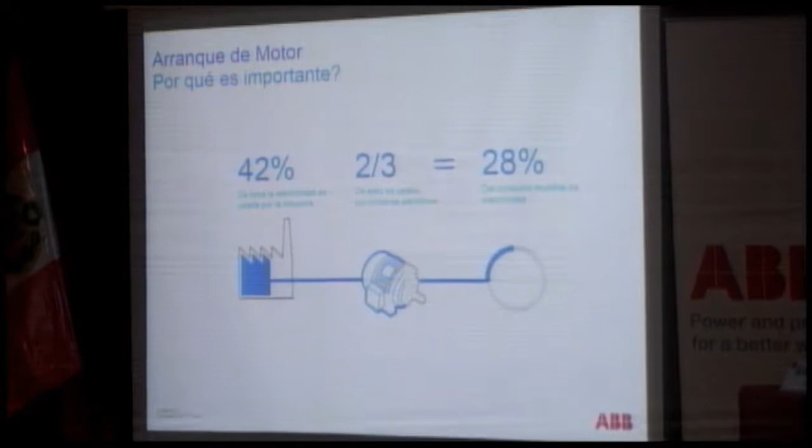Today, in the world, there are currently around 300 million electrical motors installed and running. 300 million. And this is a number that is growing steadily every year.

Out of these 300 million motors, around 90% of them are running and used in full speed applications. So when we talk about improving starting of motors, we cannot only talk about the 10% of the motors where we are allowed to vary the speed. We need to talk also about the motors that have to run at full speed and how to make them behave better.

So with all this electricity consumed by so many motors, imagine the potential we have to improve the world by doing motor optimization.

So really my first message to you today is that it matters what kind of starting method we choose, because there are so many motors we are talking about and there's so much electricity consumed.

To give you an idea of how important the electrical industrial motor is today, we have a short video showing different examples of where you will find the motor.

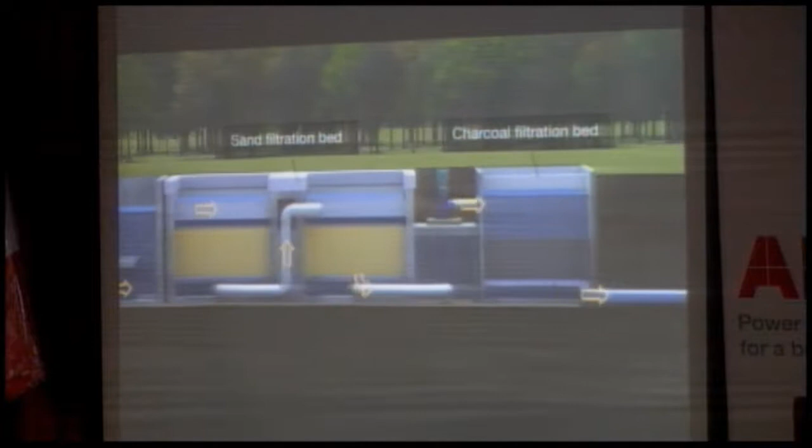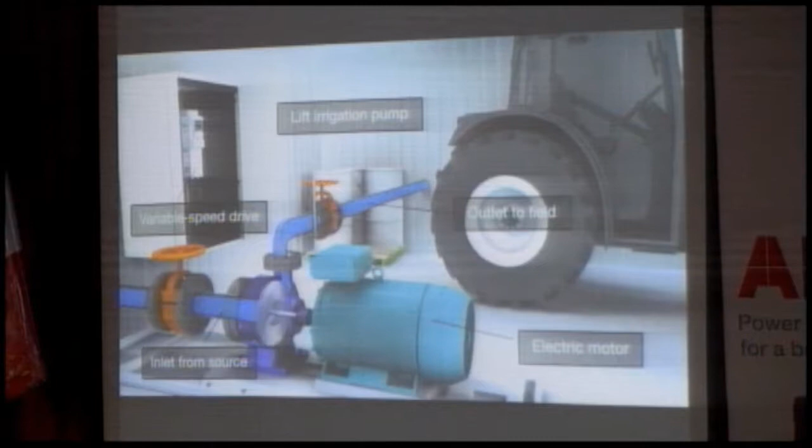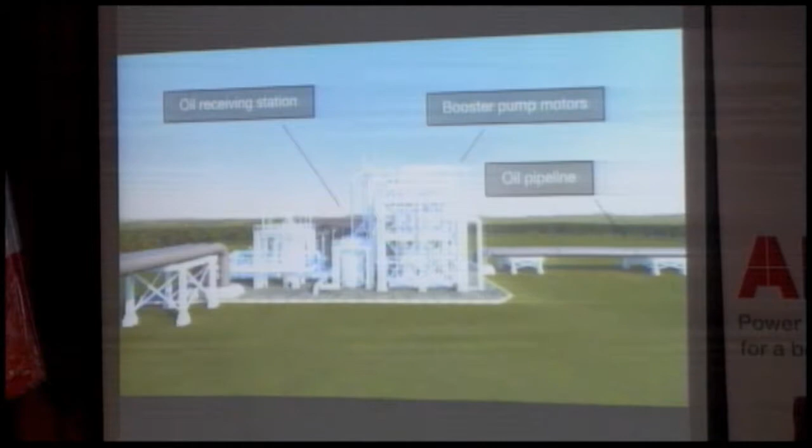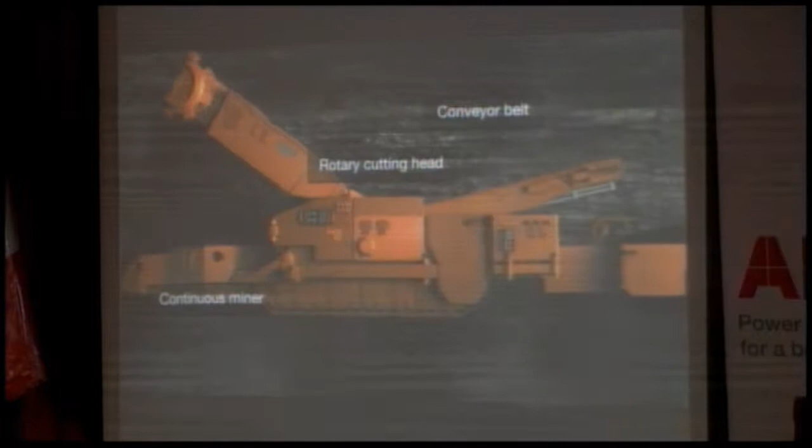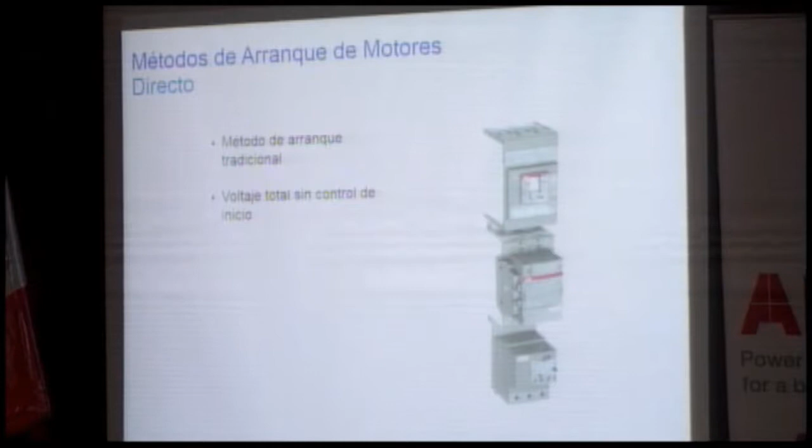It's possible to use the contactor, that is the active part of the starter, and combine that with other products to create a more complete starting solution. For example, on this picture, we have the thermal overload relay that will prevent the motor from being damaged by overload. We also have the circuit breaker that will protect the motor from short circuits.

It's the most compact starting method. It's also the cheapest one to buy. That's why it's so popular, and for this reason it's also mainly used for starting smaller motors.

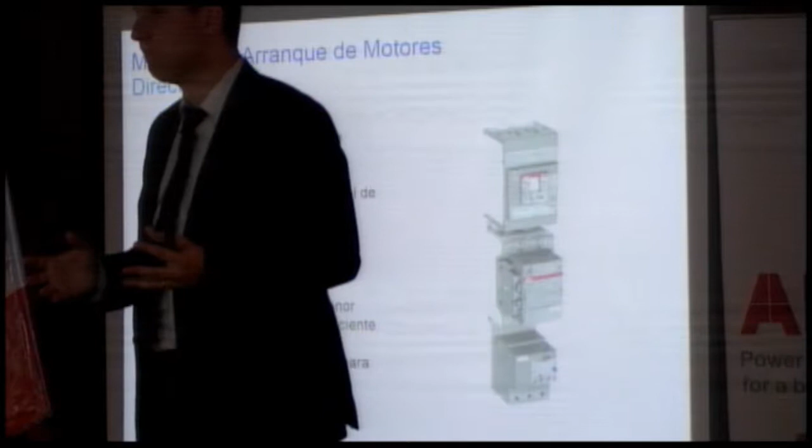But there are some things that I think you should be aware of that are consequences from using a direct online starter. We know that it's compact, cheap to use, and easy to install and understand. Those are the main benefits. But we can run into some problems.

For example, we can experience that the voltage drops during the start. This can cause problems. We can also experience that the short circuit protection will trip during the start, and this comes from the way the current is behaving during the motor acceleration.

So when we start the motor, what happens at first is that we get a very high inrush current, a peak in the current that can be as high as 20 times the normal current. Of course, the current will go down, and during the start it will follow the characteristic of the motor. But this current peak is something we need to think about when we design all the other equipment in the panel that's able to run this motor.

Then we can also experience problems with mechanical wear and tear, products that are damaged, and slipping belts. This comes from the characteristics of the torque during the start. The motor is often very powerful during the start, and it will start with a lot of extra torque that may not be needed, and the acceleration will be very fast. So this is something to think about before selecting direct online starter.

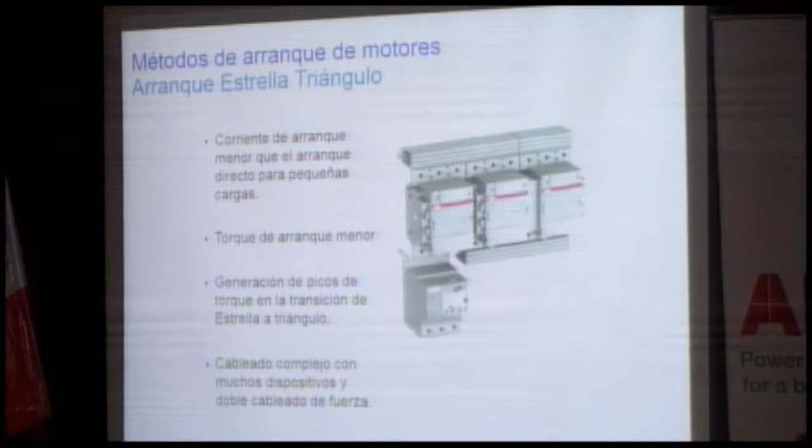To be honest, the star delta starter is a little bit complicated to install. It's a lot of cables, it's a lot of products, and it takes a little bit more time to install. Something to be aware of as well.

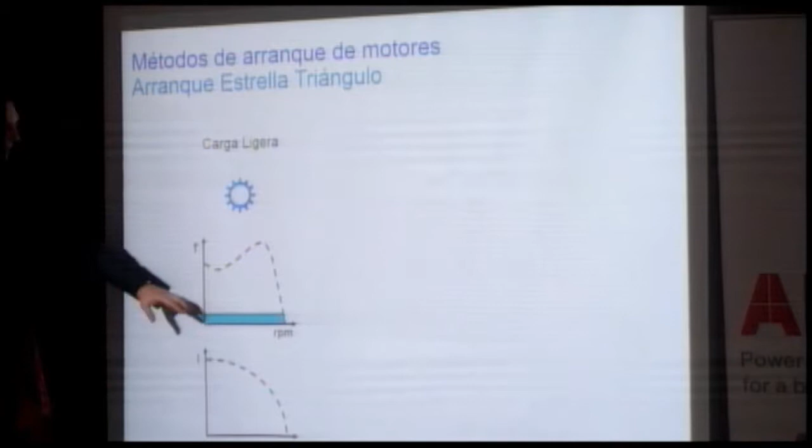So I thought I would show you a quick example of how the start will look for different kinds of loads for the star delta starter. We start with a very light start, an unloaded motor. What will happen when we start? Well, we can see that we can reduce both the torque and the current quite a lot during the start, and this is really good. This is a good solution for a small load.

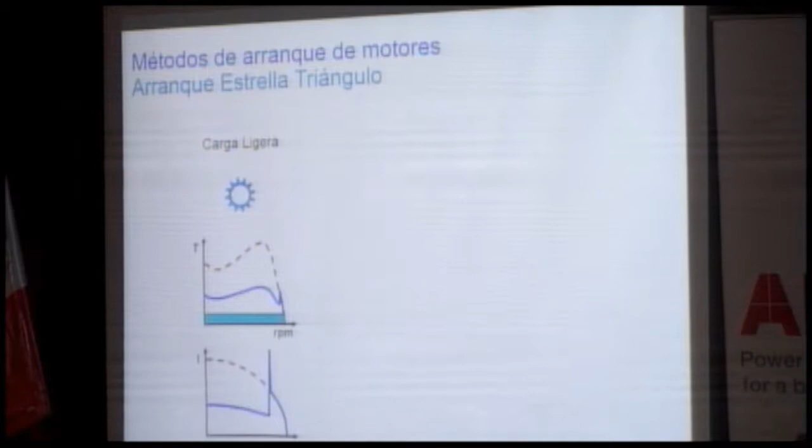When we have a medium load, typically a pump or a fan, we will see that the acceleration will be slower. So when we change between the star and delta connection, we will see a drastic increase of the torque, and this can cause a lot of problems. This can also lead to very high peak currents, something we need to be aware of.

And if we have a very heavy load, it can be a crusher, it can be a transport band that is heavy loaded at start. When we press the start, nothing will happen at first. The motor will be standing still and just making a noise. And then, after 10 seconds, we will do a direct online start when we go over to the delta connection.

So to summarize, for the star delta, it works very well for a small load. It doesn't work at all for a heavy load. And for a medium load, it can cause a lot of problems, even more problems than the direct online starter will do. Something to think about when designing a starting solution for a motor.

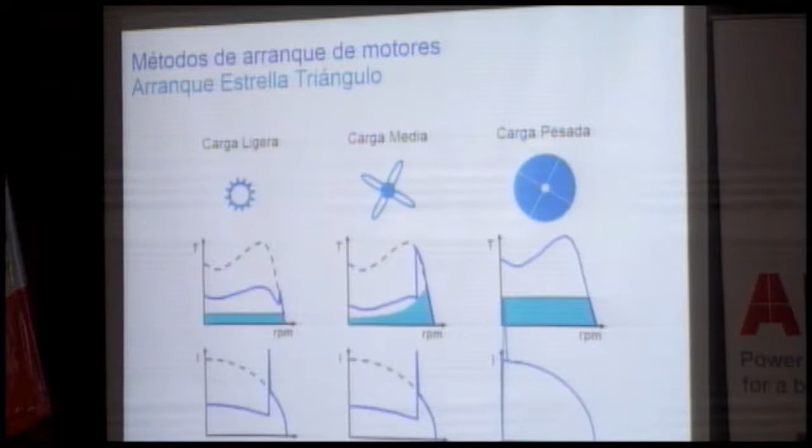Sorry. Okay, I would like to talk to you about the drive as well, a starting method that is getting more and more popular. The drive will give you full control of the acceleration, full control of the current, and full control of the torque. So it's a very versatile starting method.

It will enable you to reduce the energy consumption of the motor by reducing the speed of the motor when you don't need a full speed. For that reason, it's very good. So that is why it's very often used in process industry to obtain process control.

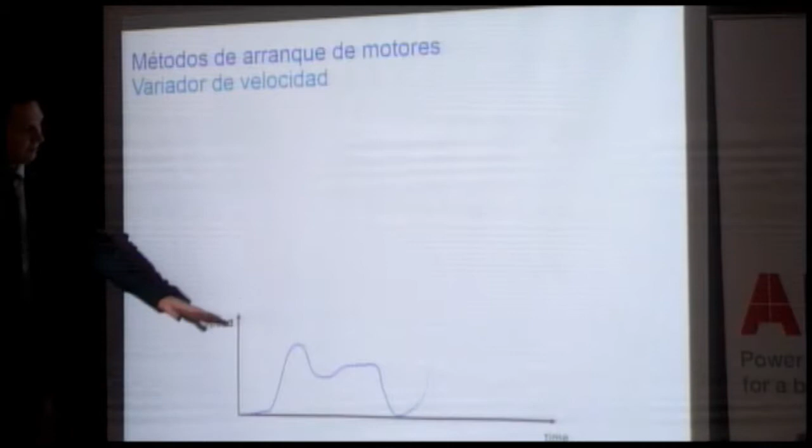But there are some things, there are some concerns with the starting method. So I would say that it's only when you have a motion pattern of the motor that needs to look like something like this, it goes up and down during the day, then you should definitely pick the drive as your starting method. But if you can run in full speed, you should consider another starting method because there are some concerns with this technology. For example, it is expensive to buy.

It is the most expensive of the three starting methods. It's quite big and heavy. A comparison: a soft starter for a 200 kilowatt motor has the size of something like this between my hands, and the weight of it will be around 15 kilos. A drive for the same motor will be of the same size as I am. It can be 2 meters tall, 1 meter wide, and the weight can be 200 kilos. So it's a completely different kind of product that needs a completely different kind of equipment to even install.

The drive will create harmonics. Harmonics are overtones, disturbances on the network that come from the way that the drive is changing the frequency. And this can cause problems for other equipment in the network, which puts higher requirement on how to install the products, with proper grounding of the cables, for example, and having good quality cables that can handle this.

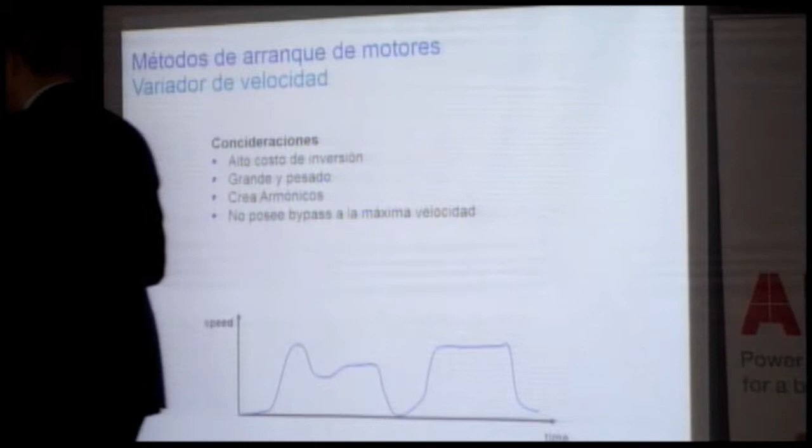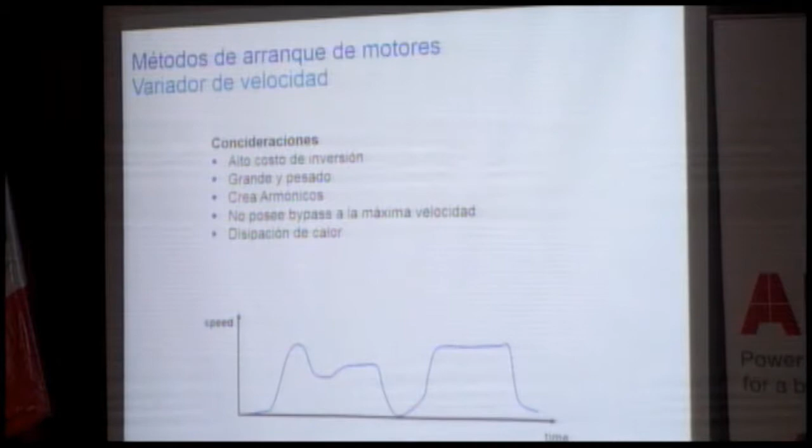You don't run the drive in bypass mode, so it will always be running with the IGBTs, and that means that it will generate a lot of heat in the panel. I will give you an example: a soft starter running on the thyristors for the 200 kilowatt motor will generate around 1000 watts. When we go in bypass mode with a soft starter, we reduce that energy consumption by 90% down to 100 watts, while the drive will consume more than 3,000 watts in heat. Something to think about.

It's not always suitable to reduce the speed of a motor. Sometimes the application will not behave well if you reduce the speed, it can cause some problems. So if you don't have need for changing the speed, you should consider another starting method. That's the message, okay?

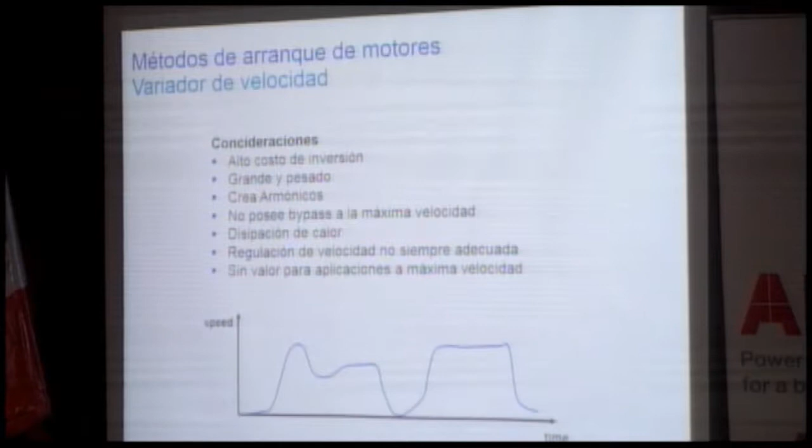Let's continue with the soft starter. The soft starter can do a soft start, of course, but also a soft stop of a full speed application. For that reason, it will reduce the starting current, it will reduce the starting torque, it will reduce the acceleration of the motor. And for that reason, it can save a lot of money for the user of the motor when it comes to less maintenance and service cost for the equipment.

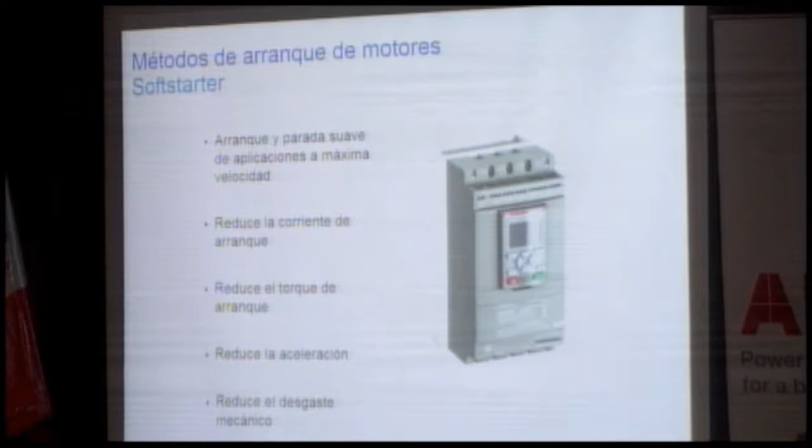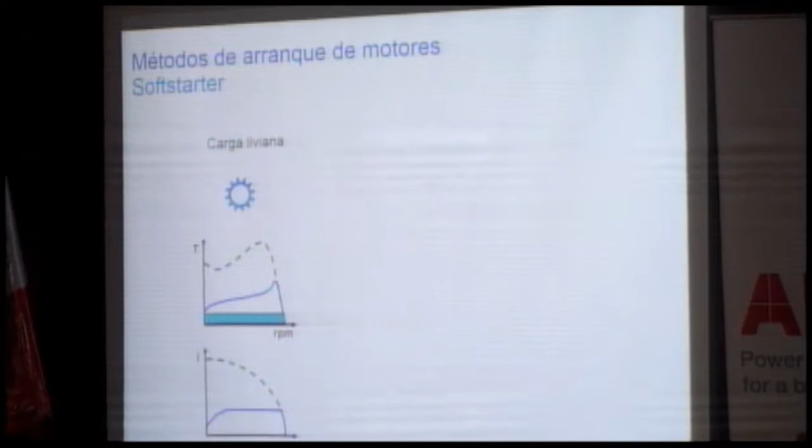If we are going to do the same start as before, but with a soft starter for the unloaded motor, we can see that we now get a similar torque and similar current as a direct online start, the star delta starter. So it both works very well. For the pump, now it's getting very interesting, because the soft starter never gets any drastic increase of torque, which means that it's a much better starting method for the pump.

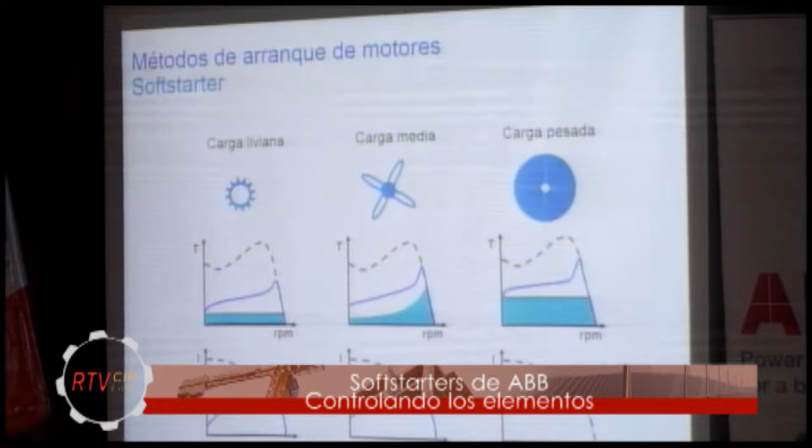And for the heavy load, we can also start it because we can change the amount of torque that the motor will get, so we can adapt it for different loads. Okay.

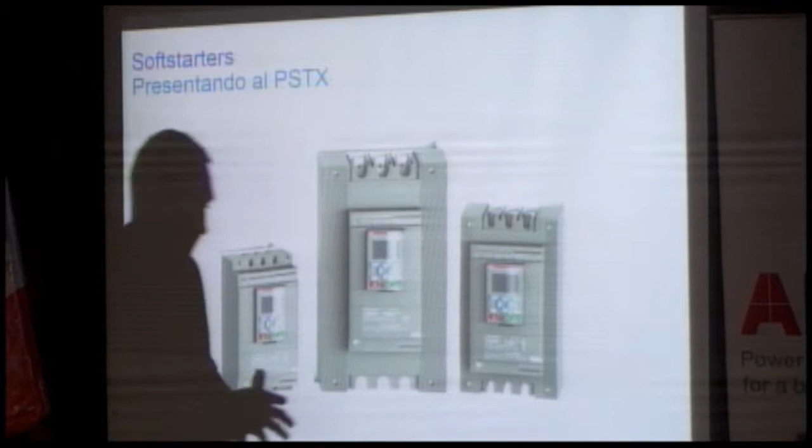Let's go into the new products and all the things we can do with the PSTX. The PSTX is the new generation of soft starters that takes the technology lead for soft starting on all markets.

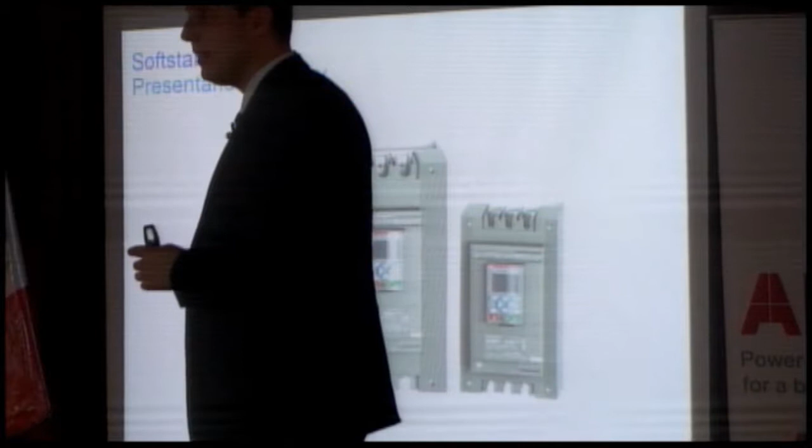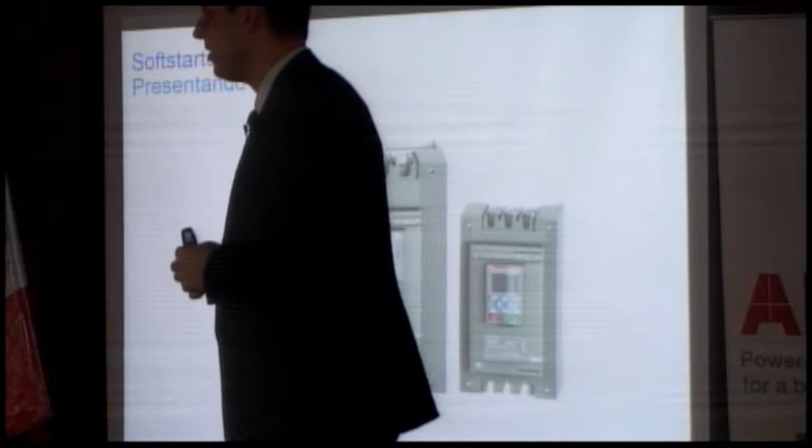We released this product some months ago, in July it was released worldwide. Step by step we have introduced this product to more and more markets, and I'm very happy to be able to introduce it to you and the Peruvian market today. We have already tried this product in Peru with great success in harsh environments, and I will come back to that later. We have also tried the product in many countries, in different continents of the world, in different environments, applications and segments. It's really showing strong results, and we have a lot of happy customers so far.

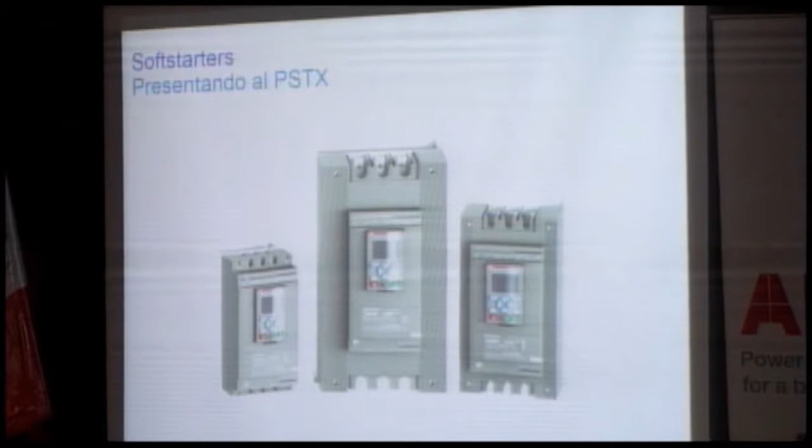To present this product, I would like to give you 3 examples of real customers and what they have told us about their experience using our soft starters. I will tell you about one customer who could reduce his starting currents by 60% by using our soft starters. I will also tell you about a customer that could build panels that were 20% smaller thanks to our soft starters. And I will tell you about a customer that got 100% longer lifetime of his pumps thanks to our soft starters.

Okay, we're going to go through them one by one. Let's start with the first one.

This is a customer that is based in Italy. It's an HVAC specialist, which means that they are making equipment for air conditioning and ventilation. This company, called Rhoss, makes air conditioning units similar to the one you can see in this room. They had a specific demand that they needed to do a very fast start due to the need of the scroll compressor, and that start was not allowed to bring a high current because they need to install the equipment in a lot of buildings, not only in heavy industry.

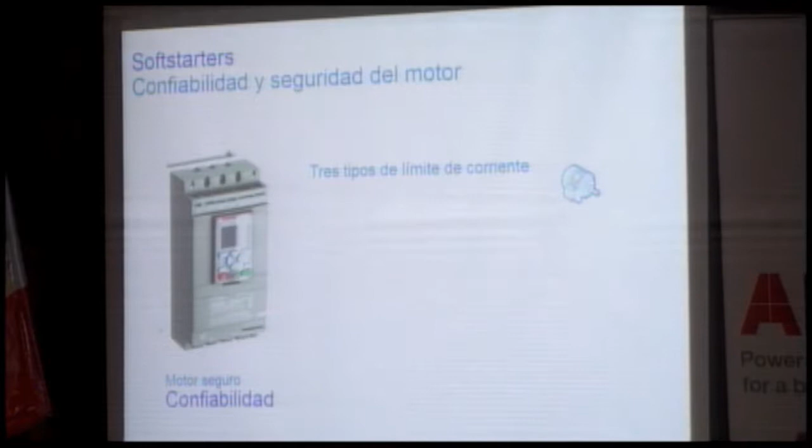I will also tell you about our new motor heating feature. We can use the soft starter to heat the motor when it's needed. I will talk about that as well. And I will tell you that we now have complete protection of the motor included in the soft starter, so the motor will be better protected than ever before with the PSTX.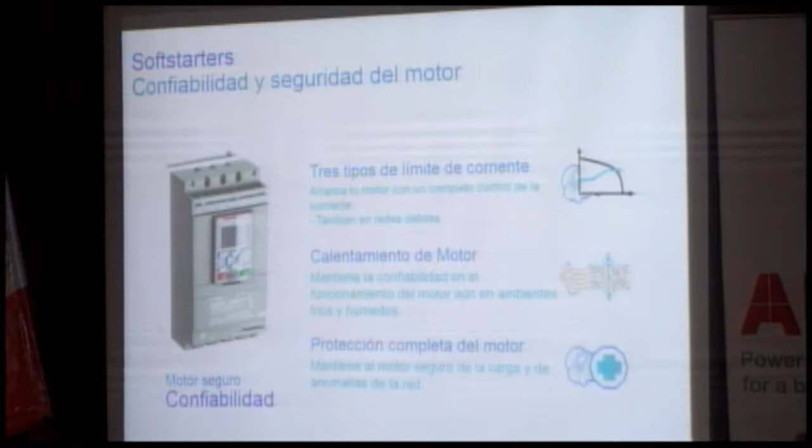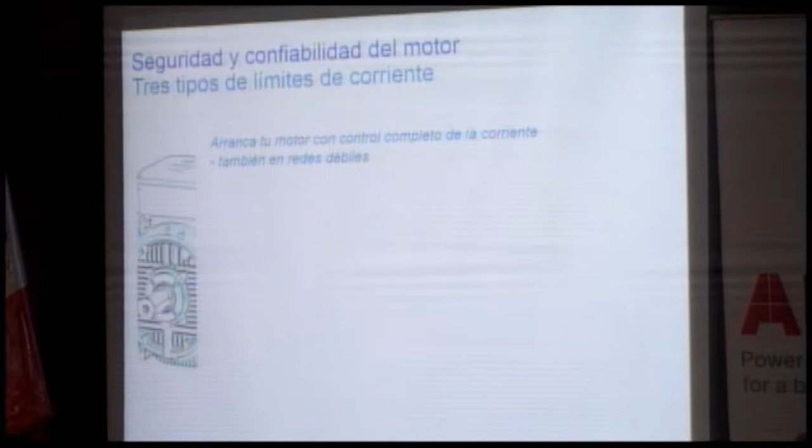So let's start with the first one: current limit. Current limit has been a feature that has been very popular for many years now. It is used by almost everyone. It allows the customer, the user, to put a maximum level of the current during the start. Very good, because that allows you to design the rest of the equipment according to this.

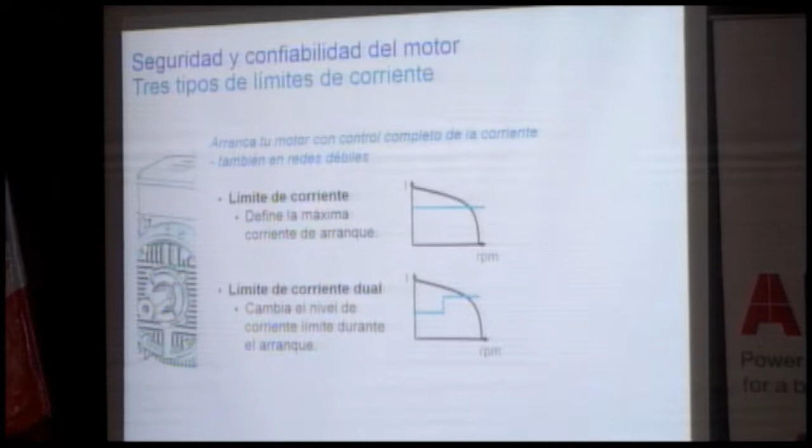But we are also introducing the dual current limit that allows you to have a lower current limit during the first seconds of the start. And when the motor is starting to accelerate, we can give extra current. This is good when we are starting in a weaker network. But the new thing with the PSTX is the current ramp, that we can increase the current softly during the start. This is very good when the transformer is not that strong.

Especially a generator can be a little bit tough to start in the beginning, and it will need to start more gently, so this is the softest start that you can get. It's really good, and this will solve a lot of problems that we otherwise could see in installations far away, in mountain areas, in mining industry, or on platforms out in the ocean where the network can be unstable.

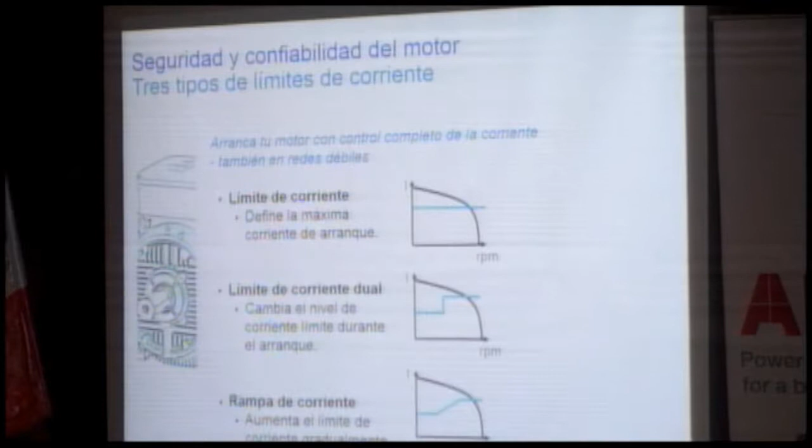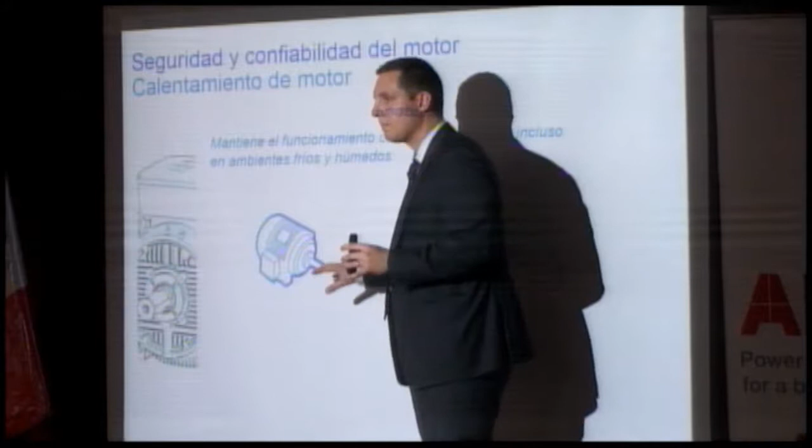We are also now introducing the motor heating feature. Why do we do this? Well, a motor can be installed in a lot of different environments. For example, in Sweden, where I'm from, we sometimes need to install the motor outdoor. So what happens in December? It snows, the temperature goes below zero, it gets wet and cold. So when we try to start the motor, the start would be very tough because the motor can even freeze. So what we have to do in Sweden is have a heater around the motor to give some power to heat it up before we start.

But with the PSTX, we have included this into the soft starter because we now have the possibility to use the windings inside the motor as heating elements and give power to them, not in a rotational magnetic field so that the motor will spin, but just in a way so we use them with DC power from the AC network and heat up the resistor and warm up the motor from the inside as a pre-starting functionality.

This is not only good in a very cold environment, because you can find cold environments not only outdoors in Sweden, but also indoors in different kinds of cold rooms, like when you have ventilation and cooling. It's also very good in countries or areas with high humidity, tropical areas, because the moisture can get inside the motor and damage it. With the preheater, we can warm up the motor first, make sure it's dry, then we do the start. This increases the reliability of the motor and makes sure it lives for a longer time. It's very nice.

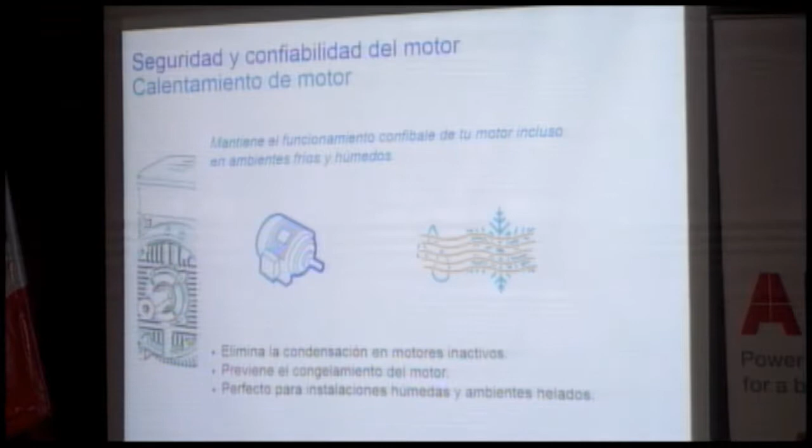Then we have motor protection. This is something very popular to include in the soft starter today: the possibility to detect different kinds of load conditions and abnormalities. For example, you can have a transportation band that suddenly has extra weight put on it, and the motor will run tougher and tougher with higher current. This can be okay for a few seconds, but if you run for too long, the motor will be damaged. The soft starter can detect this and stop the motor.

It can also detect when the load is disappearing, and I will show you an example of this in just a minute. With the PSTX, we include protection that can be connected to PT100 and PTC elements in the motor, so we can monitor the actual temperature inside the motor. The difference between these two is that the PTC gives a digital signal to the soft starter when the motor has passed a certain temperature, while the PT100 gives the exact temperature of the motor all the time, so you can monitor it.

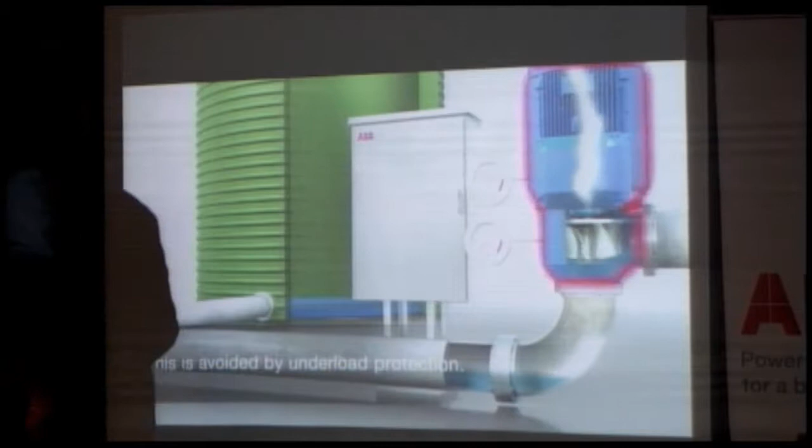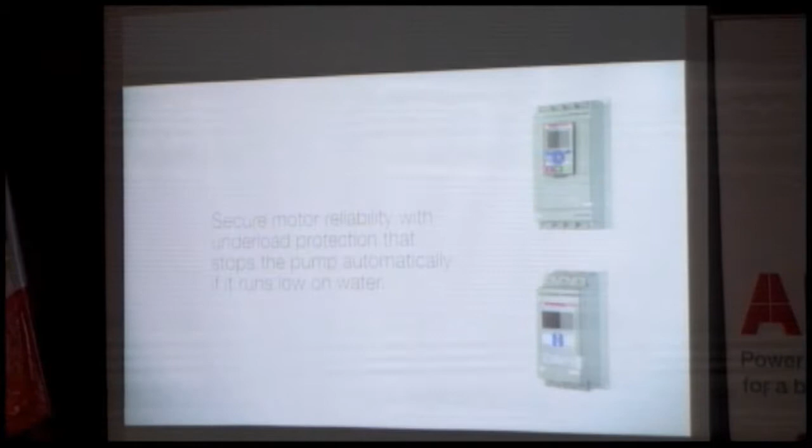So this is the underload protection. Imagine you have a pump system like this, pumping water. But for some reason, the water starts disappearing, which means the water runs out and the pump runs dry. What will happen? The pump is not designed to run without water - it will be damaged by this. If you do this too much, you will have to buy a new pump. With the PSTX, and also the PSE soft starter from ABB, you can detect this and stop the motor if it happens, saving the pump and saving a lot of money.

Let's take a look at the second customer case.

This is a customer from China. This customer is a system integrator, and they are specialized in building starting solutions for crushers for the cement and mining industries. A crusher is what we call a heavy-duty application. It's very tough to start, it's a lot of current, and in this case it's also installed in a very dirty environment.

This company was using a competitor soft starter, but they were not satisfied with the size of the panel, and they turned to ABB. We offered our solution, which has the bypass included in the soft starter, and also has a very strong design of the thyristors with a high starting capacity. So we could use a smaller soft starter than the competitor had to offer. The result: the whole panel became 20% smaller.

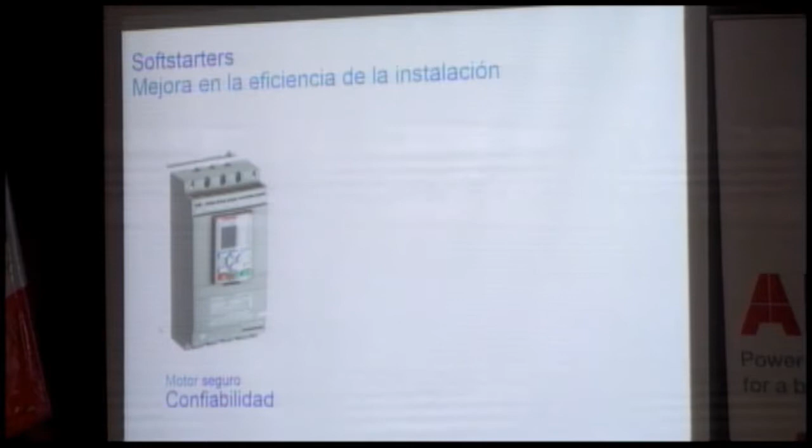The value that this company experienced is something that we call improved installation efficiency. I would like to show you a couple of examples of how we are improving efficiency when it comes to installing, running, and operating the soft starter.

I will tell you about the new keypad that is detachable, which means you can remove it from the product to put it on a panel door. I will also tell you that we have now made a built-in bypass standard for our soft starters, so that you are always sure you have the bypass. And I will tell you about the new, more flexible way to do field bus communication.

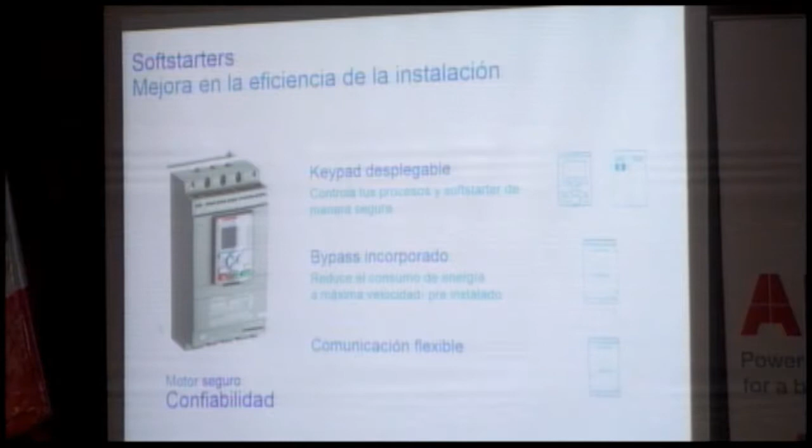Okay, let's start with the first one. With the PSTX, the keypad is removable from the product. So you can take it off and put it on your panel door and just connect it on the back with a cable, a cable that is included as well.

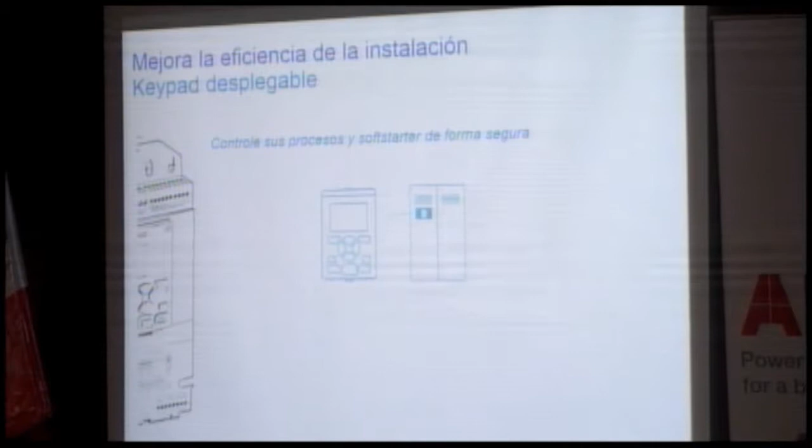Why would you like to do this? Well, if you would like to make a safe installation where the operator never has to open the panel door just to monitor what happened with the motor, or change the setting, or check the status of the soft starter or the motor. Because if you open the panel door while still running the process, there is a big risk of danger, because you have high voltage and high currents in the panel. If you put the keypad on the door, you don't need to worry about that, and you can monitor and change settings without putting yourself at any risk.

We think this is so important at ABB that we make sure everyone gets a keypad that they can put on a panel door. Before, we offered it as an accessory that you had to pay extra for. Now it's included, and it's so easy to install. You just need to punch or drill a hole in the door, put it through the hole here, and use the nut to lock it on the other side, and then you're done. Very good.

This keypad has protection class IP66, which means you can wash it with water. You can install it in harsh environments with high humidity, or where you need to clean the panel with water for some reason, or even outdoors. It's very robust, very reliable.

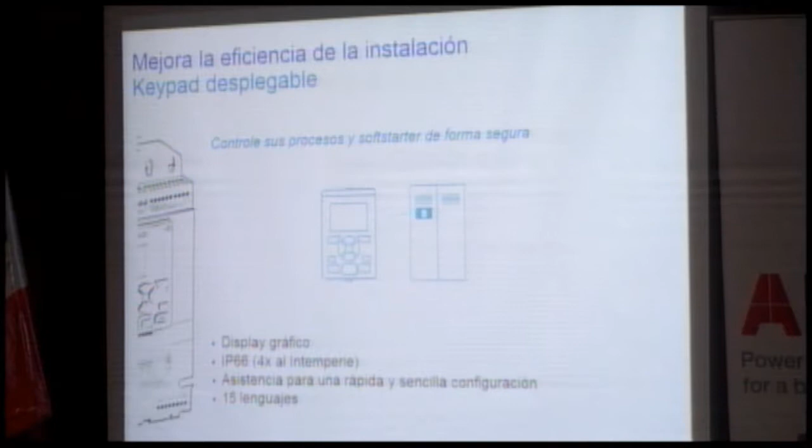We have also put a lot of effort into making setup and using the soft starter as easy as possible. For example, the display is graphical, which can show text, numbers, and even pictures. And we have assistants included, which means that with just a few clicks of the buttons here, you can prepare the soft starter for start. It's very easy.

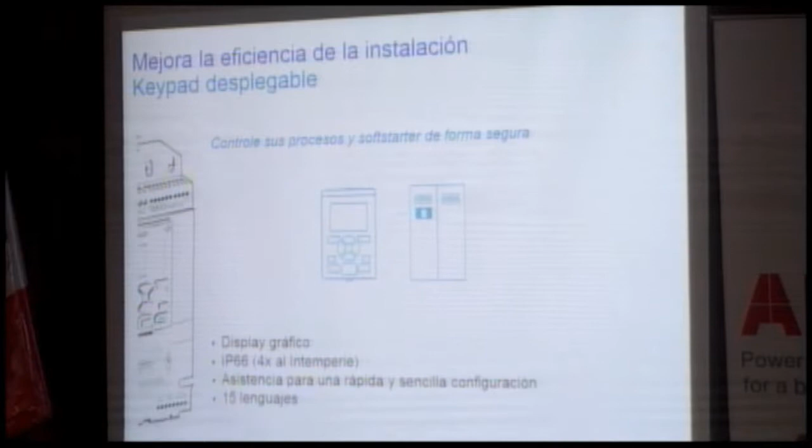The next example I would like to talk about is the built-in bypass. A bypass is a very important device to make sure that you're not using the thyristors more than you need to. You would like to have the bypass because you want to save the thyristors so that you can use the Softstarter for a longer time, and you would like to save energy from the heat losses.

This is so popular and common today that we have decided to do the job for you and include the bypass into the product, making it more compact. Thanks to this, you don't need to worry about selecting the correct bypass, you don't need to install it, and you don't need to verify that it's working, because we have already done that from the factory, so you can save time. We think the bypass is very important.

Communication. Communication is something that is getting more and more popular, to be able to have contact with the Softstarter from a distance. We have made this very easy now. We have made sure that Modbus RTU is included in the Softstarter so that you don't need to buy an accessory or install an accessory. You just connect the two wires to the Softstarter and set it up for Modbus. Very fast, very easy, very cost efficient.

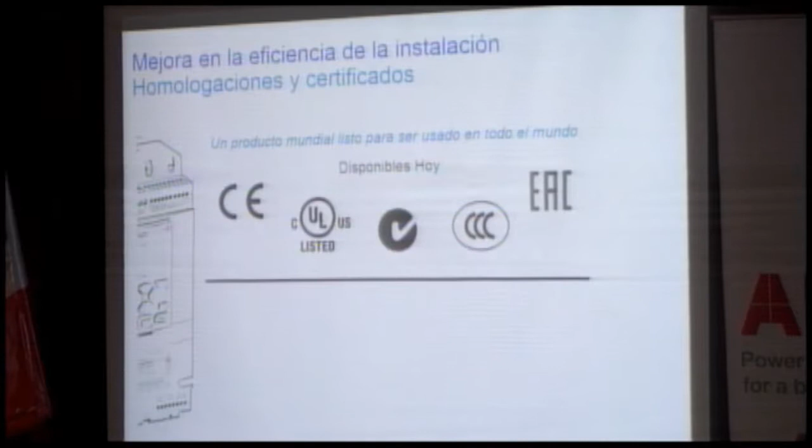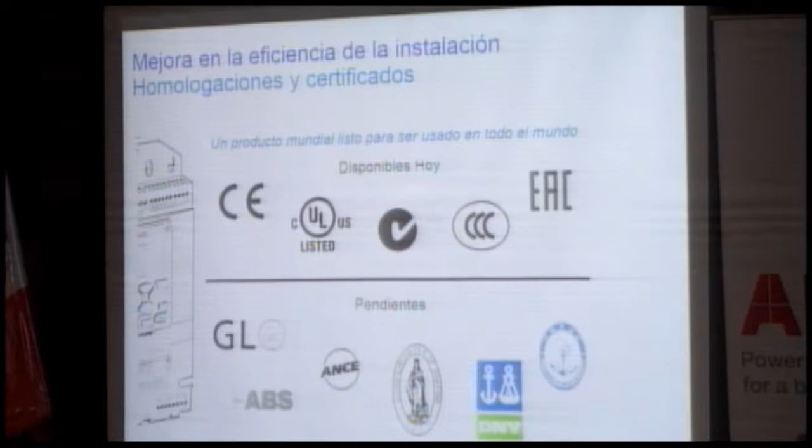This soft starter is designed to work everywhere in the world, and we have certificates and protocols to support that. So of course we are following the IEC standard, and the product is marked with that, but it's also available for the American, Australian, Chinese, and Russian markets. Right now, we are waiting for the certificate for the marine approvals to come - it's just a matter of weeks until they are ready. Then it can be used in different kinds of vessels and ships. Also very good, so this is a global product.

Let's go into the third scenario and the third value. Now we are talking about an end customer. This is a customer in Russia.

This customer has used a soft starter in a very nice solution that is able to protect the harbor of St. Petersburg from the forces of the Baltic Sea. This is not too far from Sweden, and it can blow quite heavily sometimes. When it blows a lot of wind in the ocean, it can blow a lot of water into the city. To protect themselves, the city has built a wall out in the ocean, just a few hundred meters away from the harbor. But since they have a working harbor, they need openings, doors that can open and close. For this application, we are using pumps and our soft starters to run them. This customer experienced that now, with our soft starter, they can use the pumps for twice the time. They are lasting twice the time, and they are reducing the cost of maintenance and service by 30%. We are very proud about this.

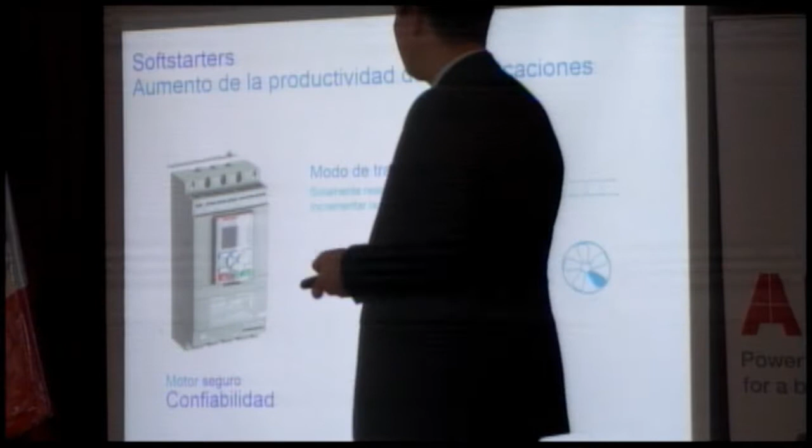Let me show you. I will tell you about the new limp mode feature that will make the soft starter continue to operate even when it's damaged. I will talk about the new jog feature, the motor jog feature. And I will tell you about the new pump control that we have. Okay, but we'll take them one by one.

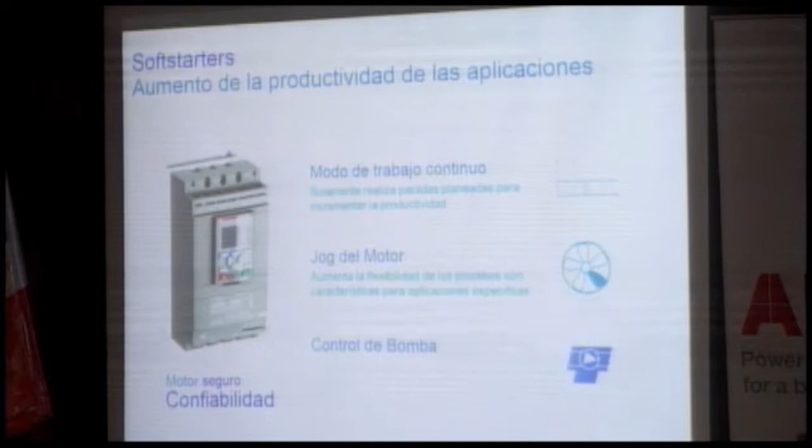We start with limp mode. Limp mode allows this soft starter, which is 3-phase control, to also operate as a two-phase control soft starter if one of the thyristors would break. And this is great because a broken thyristor is the most common problem with a soft starter. It's not the circuit board, it's not the bypass, it's the thyristors that have the biggest risk of being damaged. So to make this problem smaller, we have made sure that this soft starter can continue to operate with just control of two of the phases. And it still will have all the protections available, all the basic functionality like start and stop, and even torque control. All this is available.

And the reason why we can do this is because we have the best two-phase control soft starter on the market. It's called the PSE. So we have included the PSE algorithms in the PSTX as a backup, as an emergency mode.

So the idea behind this is that if something would happen to the soft starter, to one thyristor, the user can still run the motor until he has time to do the service. He doesn't need to stop the production just because of the soft starter. He can continue to operate and get the spare part sent all the way from Sweden, then do the service when the spare part has arrived. Really nice.

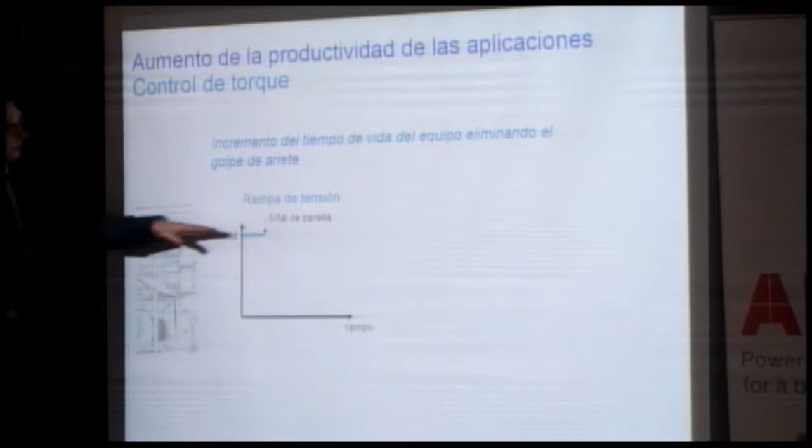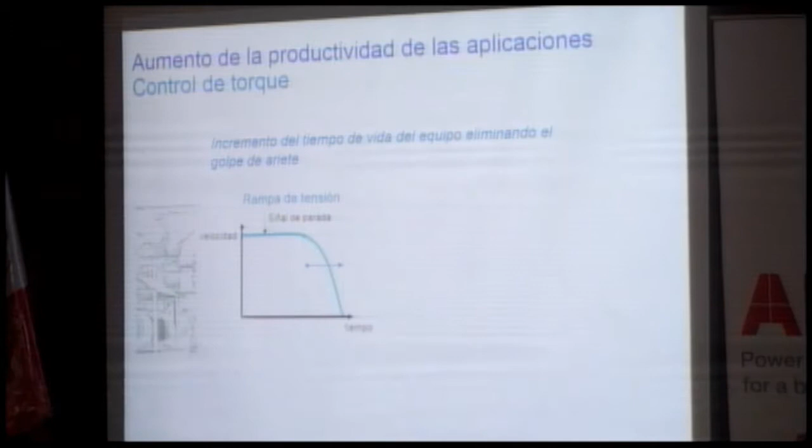Because when you're running in full speed with the pump and you're using a normal soft starter, when you give the stop signal, what will happen first? Well, nothing will happen with the speed at first. And then after some time, everything will happen at the same time. And this is because of some physical laws.

When the motor is turning and the pump is turning, even if you reduce the voltage, the pump would like to continue to turn. So the immediate response is that the current goes up, keeping the power at the same level. When the voltage gets low enough, then the current cannot pull up and it will stop very fast. This will cause water hammering, because even if you set a 10-second ramp time, you only get a few seconds of actual stopping time. And the stopping time is the important one here.

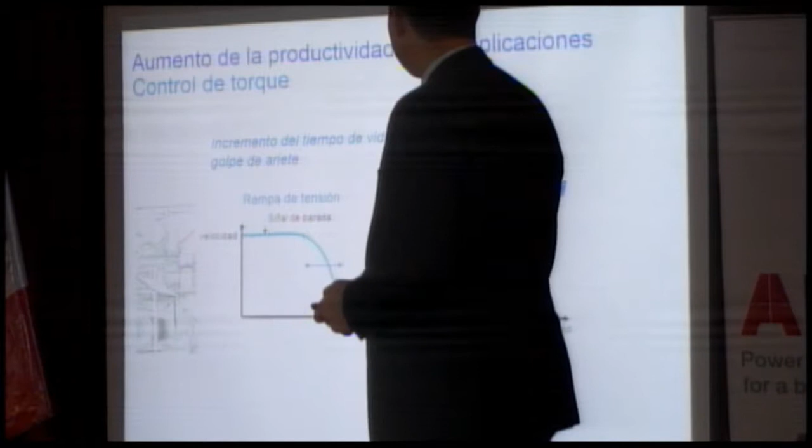That's why we introduced the torque control. Torque control was the result of a long time of engineering and science from ABB, together with one of the biggest pump manufacturers in the world. Together with them, we could try different algorithms to get the perfect way of stopping a pump. And I can probably say that our torque control solution is probably the best torque control available on the market, because we have put so much time and effort into getting it absolutely right.

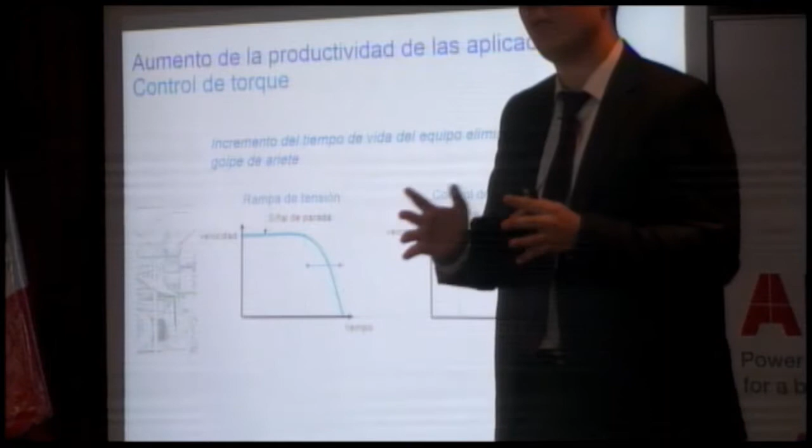So what will happen? You have a full speed running pump, you give the stop signal, and the soft starter will decelerate the motor softly down to 0 speed and have full control of the pump all the way down. And that would give us full control of the water flow as well. Really nice - it avoids the water hammering problems from stopping pumps. This is something we have that is called torque control, and it's part of the pump control functionality.

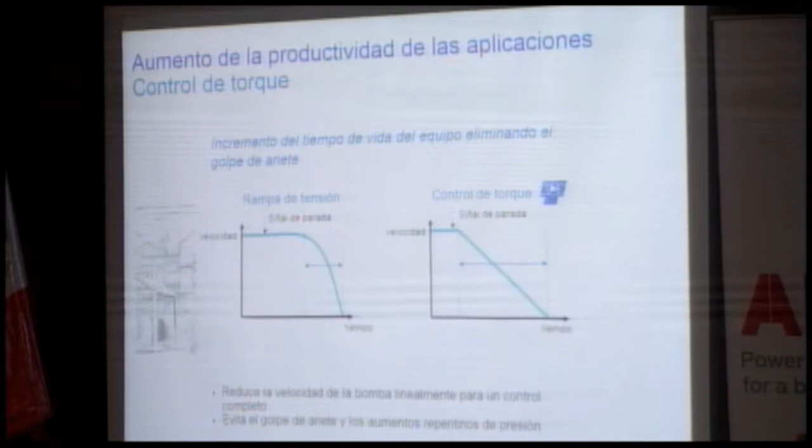But we are also adding... I actually have a video to show you this. I think it can be nice to go through it.

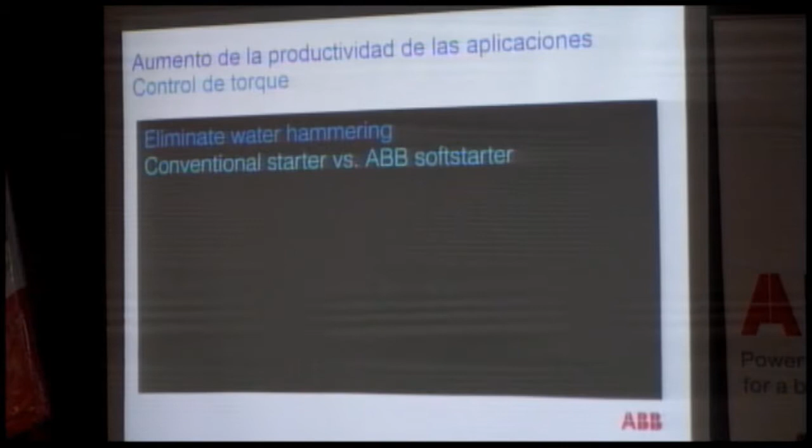So in this video, we are comparing different starting methods and stopping methods to see the difference. We have the PSTX compared to the conventional direct online starter.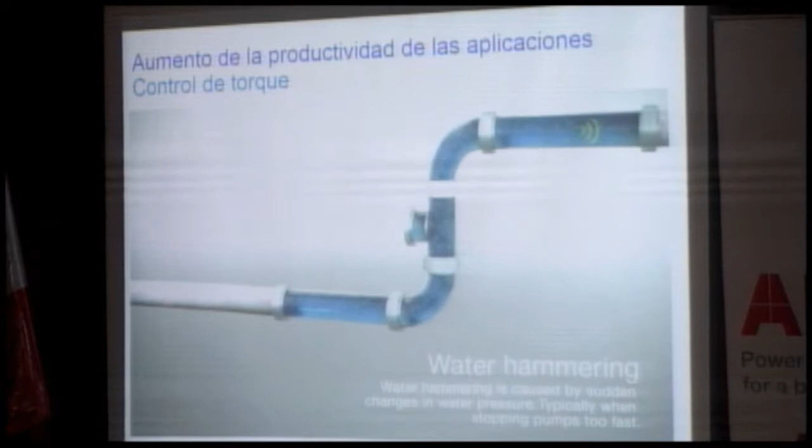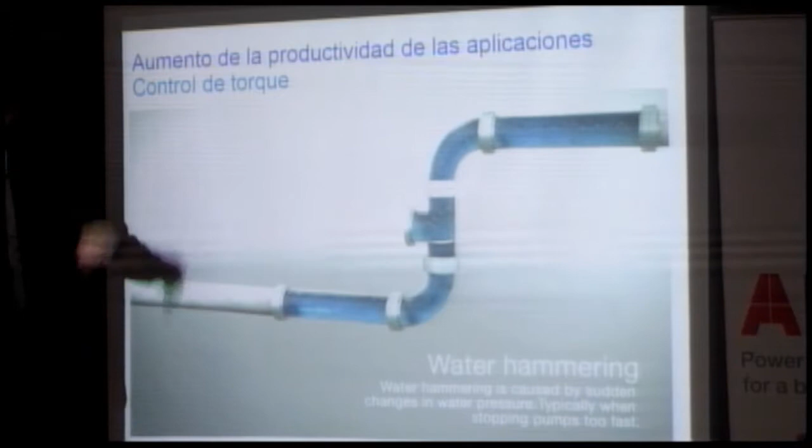And this is what I'm talking about, water hammering. We have water flowing in the pipe system. Then we give a stop signal. What happens? The water can come back and hit the pipes, hit the pump, hit the valves, and create damage. And this is exactly what happens when we use a direct online starter.

Then we try a voltage ramp. Well, we get a much softer start. I'm sorry, but the graph here is not very visible. But we get a softer start, so that's good. But when we stop it, we are giving the stop signal, but nothing happens. The pump is still running in full speed and water is flowing. And then it stops, and you still get the water hammer.

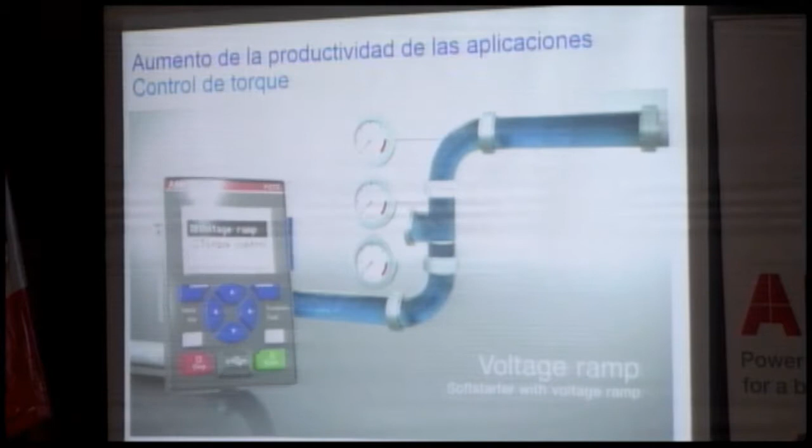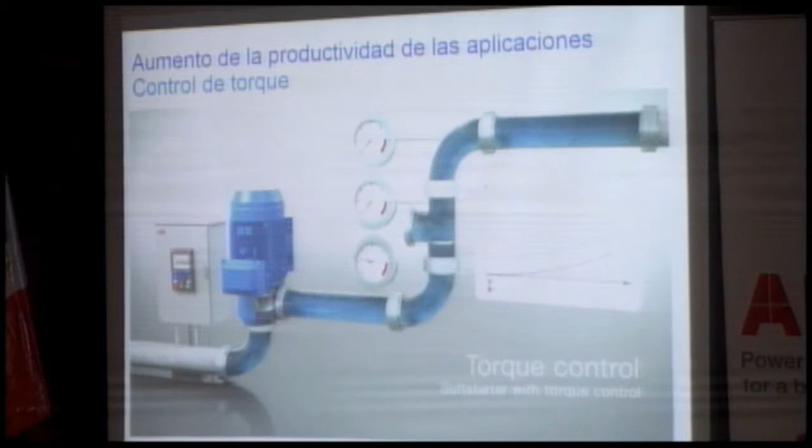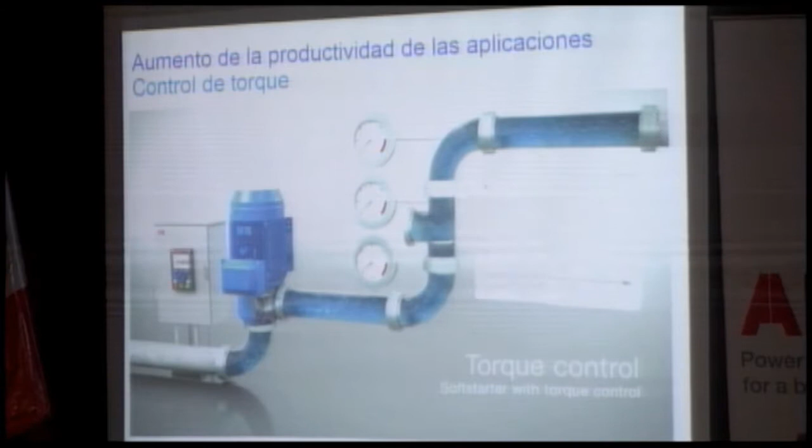When activating the torque control, you will see how soft and nice this will be. The start is very soft, and when we do the stop, we have a slow deceleration of the water and keep full control of it. And this is thanks to some real engineering work being done at ABB in Sweden in collaboration with a pump manufacturer.

The next pump feature is the pump cleaning feature. Pump cleaning is very good to use in wastewater facilities. When you have the wastewater, you need to pump back the water from all the houses, all the industry, to the cleaning facility to be able to purify the water. When you do that, you're transporting water that is not clean, it has a lot of material in it, and this material can get stuck in the pipes, in the pump, in the valves, and so on. Over time, this will reduce the flow through the pipe system, and the efficiency will go down. What is the solution to this? We need to clean it some way.

The most common way to clean it is to go to the pump or to the starter. You do a start, then stop it, switch the phases so you can start in the opposite direction, because maybe backward flow can solve this. Then you stop it, disconnect the cables, put them back, attach them, and do a start in the right direction. You stop it, and you have to do it a couple of times.

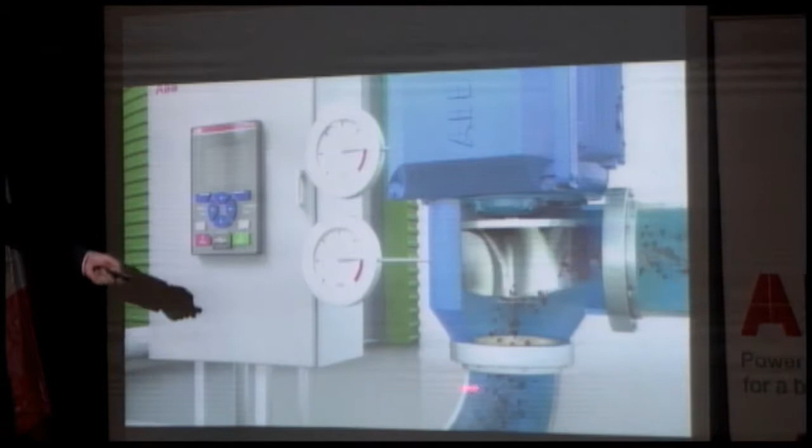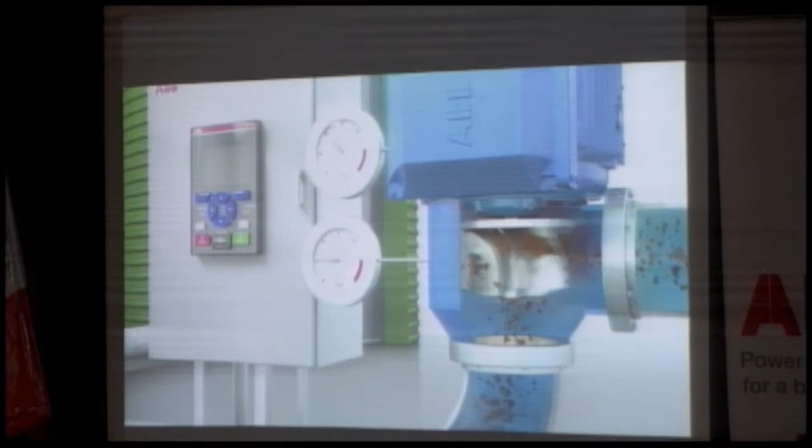I'm going to show you how it works. So we have our pump system again, but now we have wastewater coming through. What happens? It can get stuck over time, maybe worse and worse, and the pressure is reducing, the flow is reducing, until the pump can almost stop from this. That is when you should activate the pump cleaning. With the pump cleaning, we go backwards, we go forward, we go backwards, we go forward, as many times as we need to get this clean. And then we can go as normal again.

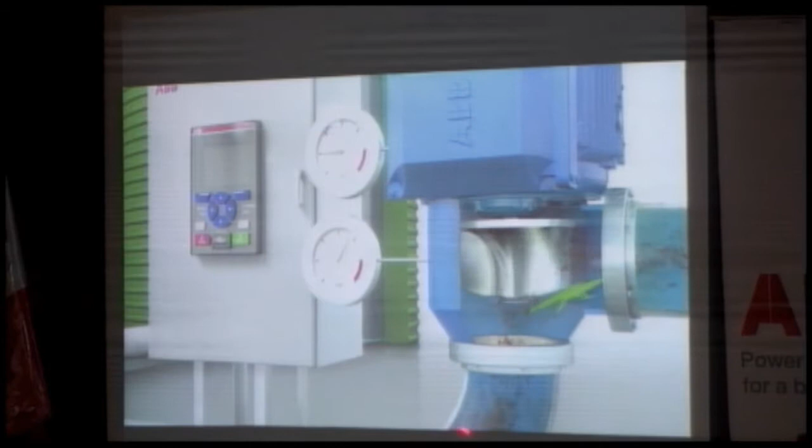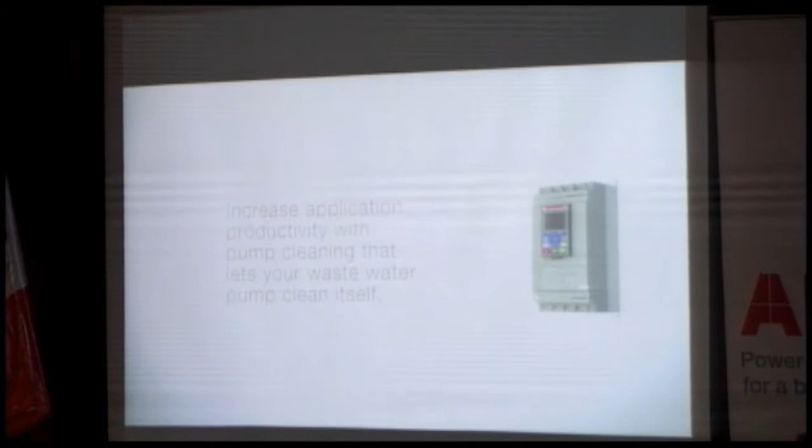Did you see the crocodile? There's actually a reason why we put it into the animation. It's a story from one of your neighbors. It was in Colombia. A customer of ours, they're making pumps that they put into rivers to pump up water from the rivers and spread it out for farming or something like that. They had made an installation with a lot of pumps, and one of the pumps didn't work properly. It had a low flow through it.

My customer told me he was so angry because he wanted it to work, so he told the service engineer, 'You have not done a good job here, you need to go down there and fix this.' And the guy said, okay, I will go down. Just stop the pump. And an alligator floats up on the pump. It was an alligator that was stuck in the pump. They were all afraid, of course. They ran away and hid.

So it could happen, and pump cleaning would have solved this, because moving the flow backwards would get rid of the alligator. So it's good use. It's good use.

I would like to take you through a last feature, something I think is quite exciting as well. This time we go away from the pumps and into ventilation and fans. Let me explain the application that we have in mind. Here we have a ventilation system seen from above, with two fans working in parallel to create a common flow of air, a double flow of air.

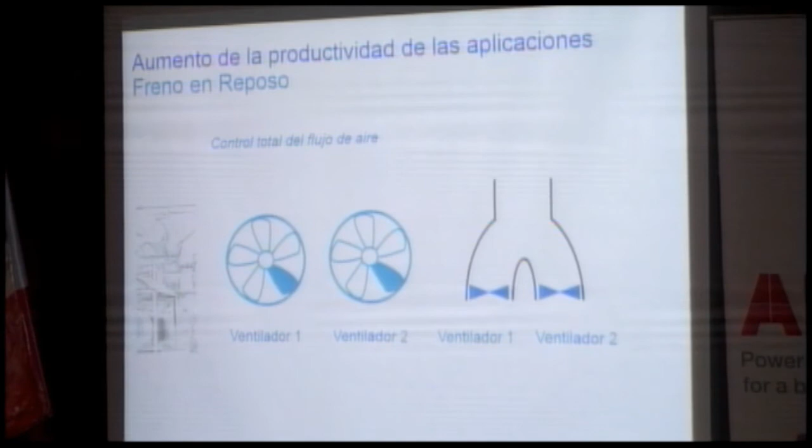But what will happen? You run both of them, and then you decide to stop one—what will happen? I will show you what can happen.

So we recognize the ventilation system. We are blowing air, we have full flow from both of them. We are stopping the fan on the right hand side until it stops. So far, so good—we have reduced the flow by half. But what happens? The flow of air can go two ways now, and it will, and that will cause the fan to start spinning in the wrong direction from the airflow. So you don't get the airflow that you intended to get.